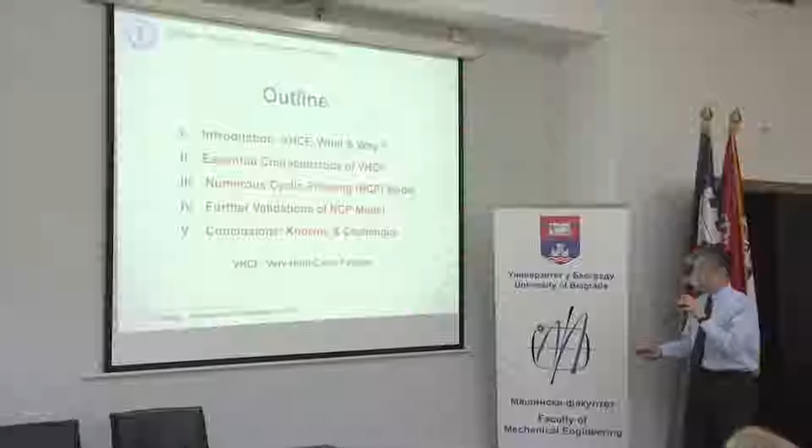Okay, this is the outline of my talk today. First, I have to give a brief introduction about Very High Cycle Fatigue. Perhaps some of you are familiar with this topic, and some are not, so I will give a brief introduction, then emphasize three aspects of Very High Cycle Fatigue. Finally, I give some conclusions, including knowns and challenges.

Okay, first I will say something about Very High Cycle Fatigue. Very simply, Very High Cycle Fatigue is fatigue failure beyond 10 to the 7 cycles of loading. Conventionally, fatigue limit is regarded as the fatigue stress or strength at loading cycles of 10 million.

This is an example showing this phenomenon: at 10 to the 7 cycles, this is conventional fatigue behavior, but after these points, beyond 10 to the 7 cycles of loading, fatigue failure may still happen. So we call this very high cycle fatigue—it's different from the conventional fatigue definition.

This is an example showing the major importance of very high cycle fatigue: fatigue crack initiation is almost always from the inside, from the interior of the material, the specimen. This example shows a cross-section of a specimen and the point of initiation, with an enlargement showing this type of morphology, and further enlargement showing the detailed feature of this initiation spot. I will go into detail about this phenomenon.

We always say very high cycle fatigue is a very important area to investigate, because many engineering structures require a large number of cycles of performance, often beyond 100 million cycles. Such a very high cycle is easy to reach—for example, if the frequency is 1 Hertz, just a little more than 3 years will reach 100 million cycles, and if the frequency is 10 Hertz, just 1 year will give more than 300 million cycles.

Here I will give you two very interesting, or very sad, examples. One happened about 4 months ago in the US: Southwest Airlines flight 1380. Perhaps most of us know this case—there was a Boeing airplane with damage to an engine blade made of titanium alloy, and the damage of the blade caused damage to the cowling, which hit a window. This accident killed a passenger—it was a lady.

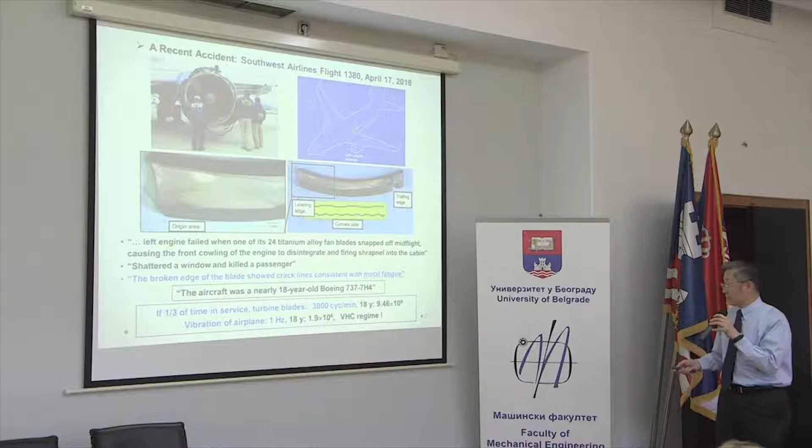Later examination showed a phenomenon of fatigue crack initiation and propagation, due to metal fatigue. What I'd like to emphasize is this airplane was already 18 years old, meaning it experienced more than 9 billion cycles of loading if we consider the rotation of the turbine. If we just consider the vibration of the airplane, it experienced about 200 million loading cycles. So it experienced a kind of very high cycle fatigue process. This is a very important point.

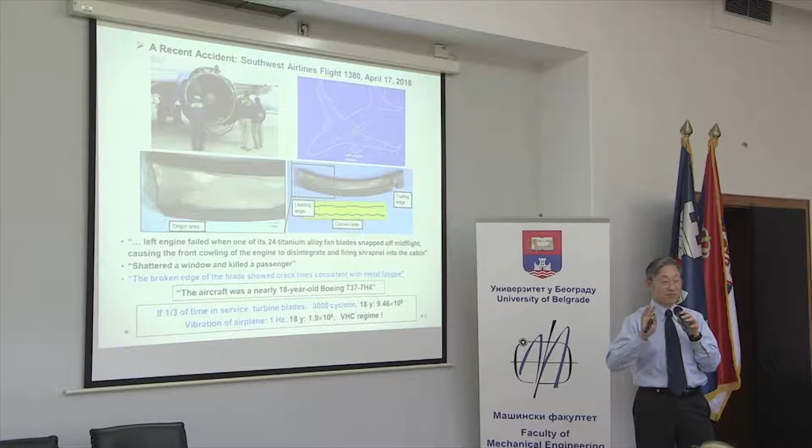So sometimes I say, for some new structures, new vehicles, they're very safe, no problem. But for some old ones, we should be very careful. I will say something in detail in my later slides.

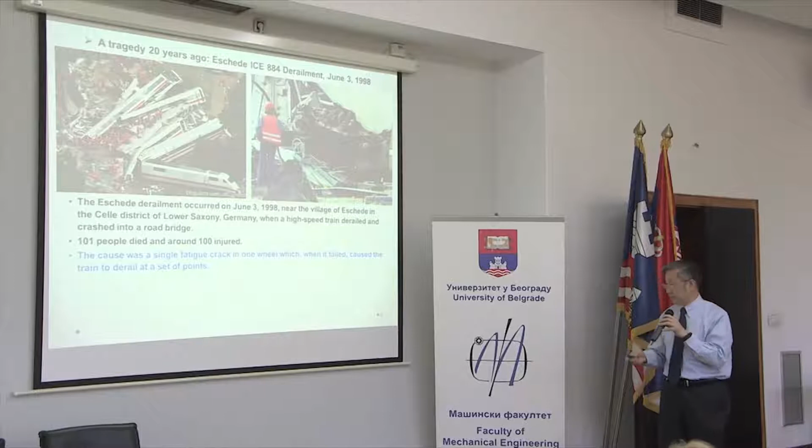Another case I think all of us know is the Eschede tragedy of the high-speed train. It happened about 20 years ago, and perhaps all of us know these noticed pictures, which I found from the internet. It's a very sad case that killed 101 people and injured another 100. What I'd like to emphasize is that this high-speed train had been in service for more than 7 years at the time of the tragedy, and it was a fracture of the wheel. It's a kind of wheel tyre fracture, and the final layer of the wheel fractured due to fatigue. It's a very sad story that caused a series of damage and this type of tragedy. This high-speed train had 7 years of service and experienced more than 1 billion cycles of loading.

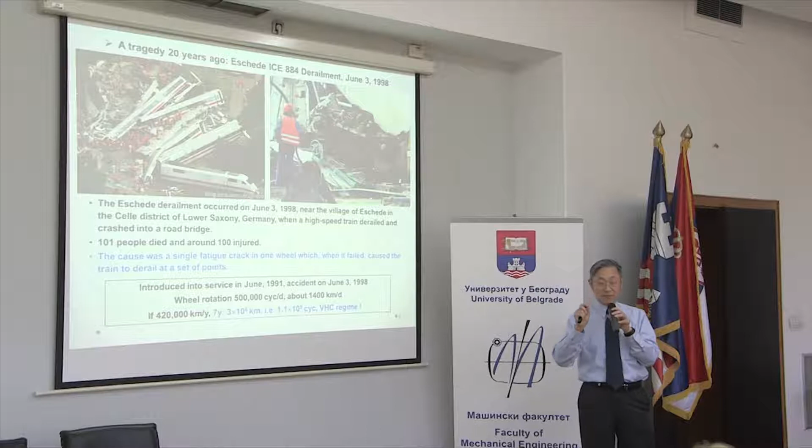Again, for the new ones, they are safe, but for some old ones, we should be very careful. Sometimes I discuss this concept at conferences, even in China. Now high-speed trains are quite popular and people are very happy because they are quite new. I say, perhaps after 10 years, we should be very careful, because perhaps some very, very tiny defects could develop. So we should have very strict regulations for this.

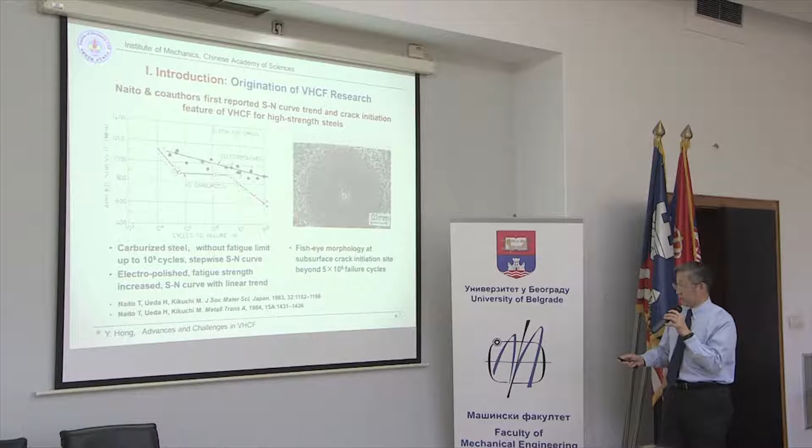Now I'd like to mention the origination of very high cycle fatigue research. Conventional fatigue is fatigue behavior less than 10 to the 7 cycles of loading, but very high cycle fatigue is beyond that. The origination of very high cycle fatigue research was about 35 years ago. This is an example for high-strength steels showing fatigue failure may happen after 10 to the 7 cycles of loading, with crack initiation from the interior of the specimen. Also for titanium alloy, I noticed this is almost the first paper on very high cycle fatigue, again beyond 10 to the 7 cycles.

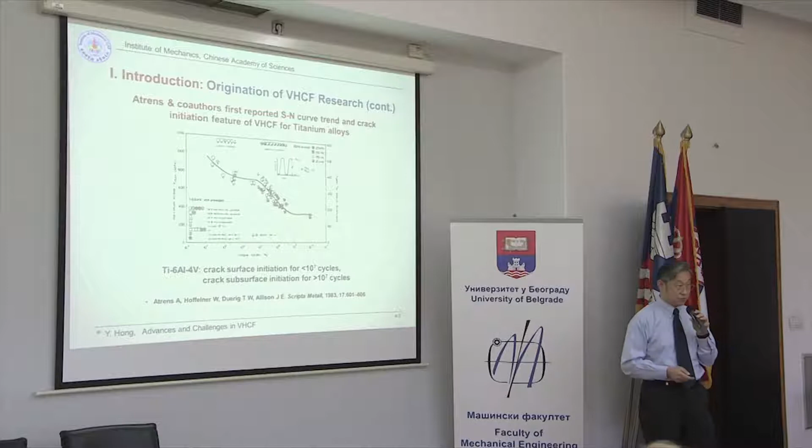The previous one for high-strength steels was done by Japanese researchers, and this one was by Swedish researchers. Of course, Professor Ritchie also did some very early work, I think in the late 80s or early 90s. There was a special issue of a fatigue journal, and Professor Ritchie was one of the authors of a paper in that special issue. As I mentioned before, in the early 80s Naito and his co-authors, and Atrens and his co-authors, first reported the phenomenon of very high cycle fatigue, but they just called it long-life fatigue. In '86, Stanzl and his co-authors called it very high cycle fatigue for the first time in a research paper. So the contributions by Japanese researchers, Swedish researchers, and also from Austria, form the basis of the origination of very high cycle fatigue research. These are almost the early days of research in this area.

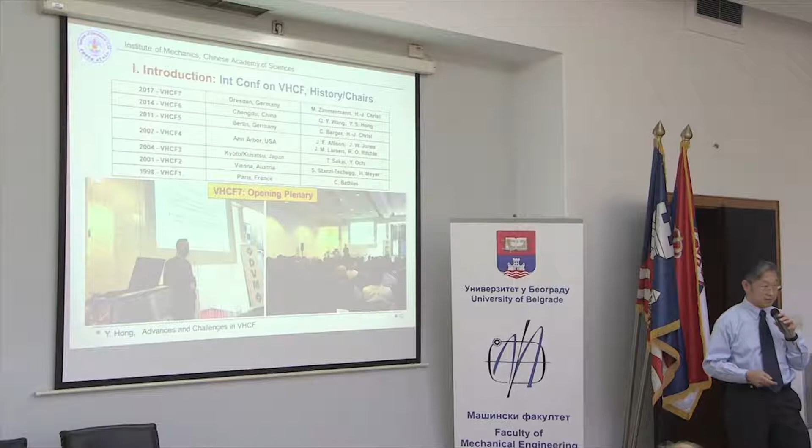This topic, this regime, has been quite noticed by the fatigue community. Since 1998, there has been an international conference on very high cycle fatigue, and then almost every 3 years there has been a conference, number 1 to number 7. The next one we'll have in 2 years in Japan. This is the one from last year in Dresden, Germany, where I was also invited to give a talk.

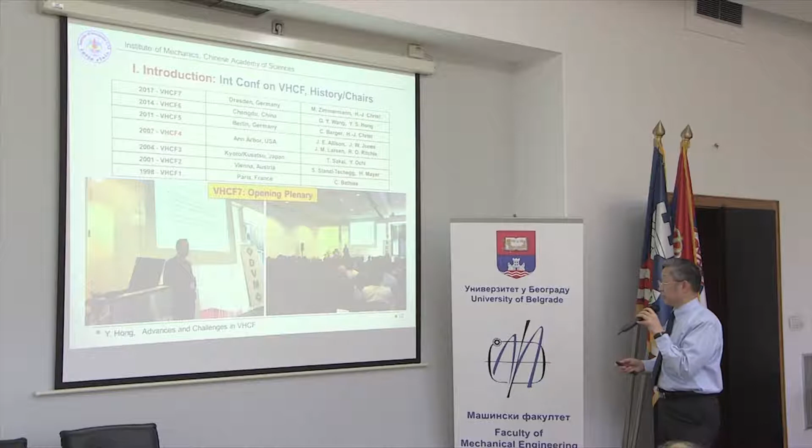I use this slide because I gave a talk some months ago in France at this International Congress on Fatigue. A professor from Germany—what's his name? He's a very famous professor who gave a contribution on the interaction between crack and dislocations. No, not Sosila... He's a guest editor of a special issue to commemorate Professor Bathias. Sorry to ask, but sometimes my heart has some problem, and I'll recover in a later class. Anyway, he raised a question that when someone talks about very high cycle fatigue, we should mention this series of international conferences, and later I noted the first one was organized by Professor Bathias from France.

Anyway, perhaps I used too much time for the introduction, so I will now emphasize 3 aspects of very high cycle fatigue.

So the first aspect is the essential characteristics of very high cycle fatigue, and in this part I emphasize three points. The first is internal crack initiation. Second is the SN curve style, and the third is the crack initiation life. These are the three points I would emphasize in this part.

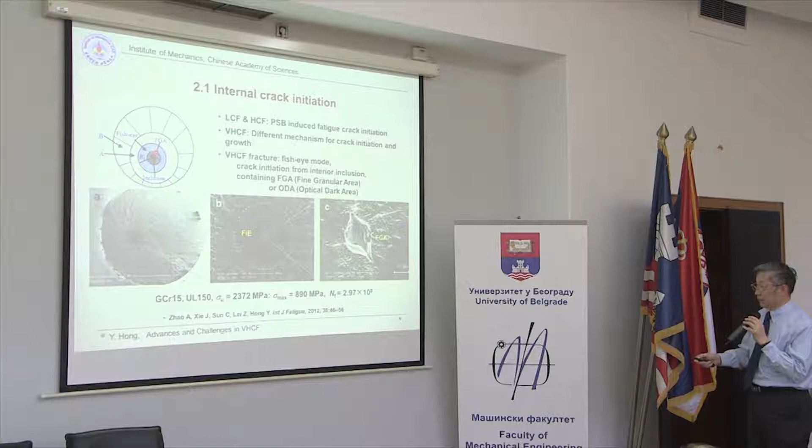This is an example of very high cycle fatigue. We may see the initiation spot, and there's a morphology called fisheye, and around the initiation spot there's a rough fracture surface called the fine granular area. This is the schematic showing this morphology: initiation spot, FGA fine granular area, fisheye, and then the crack growth region.

This is the case for very high cycle fatigue under a high stress field. This example shows the initiation spot, the FGA region, and fisheye. We may notice that this example is due to loading of rotating bending, so the initiation spot is somehow close to the specimen surface.

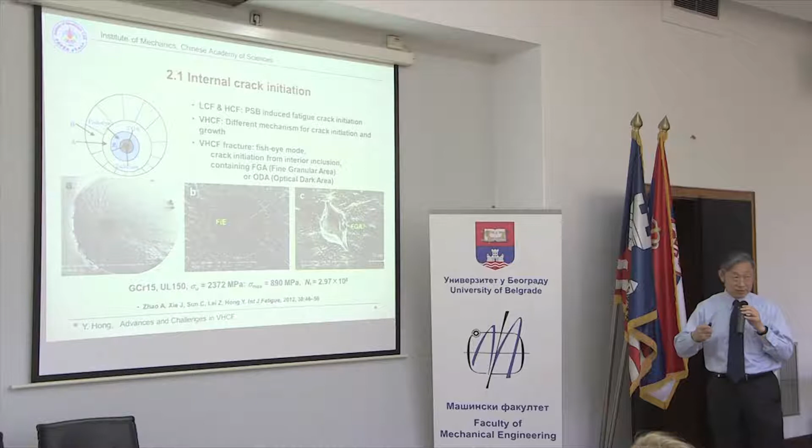The previous one is subject to axial loading, so the initiation location is somehow away from the surface. So it's different. One of the reasons is due to the different styles or modes of loading.

We measure the size of this FGA, fine granular area, and find the size is between 40 and 100 microns - a very small size. I measured this; this is the initiation area.

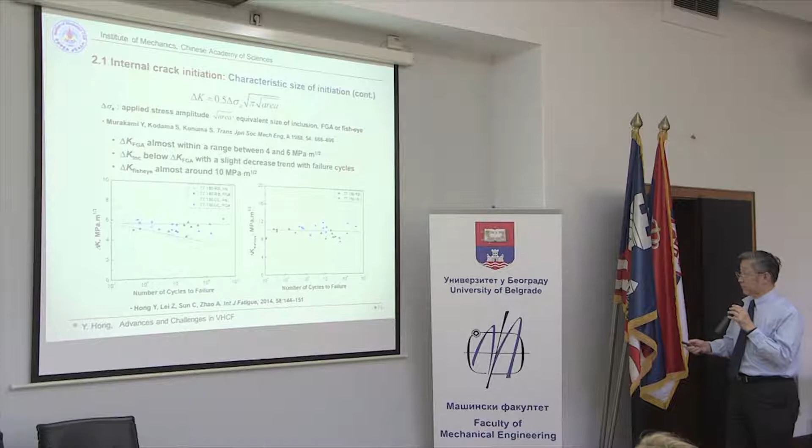We also have more data to show this, and we use the parameter delta K, the stress intensity factor range, to characterize this small area. The data show delta K FGA is between 4 and 6 megapascal root meter. We collected a large number of data from the literature to show the size of FGA as a function of maximum stress, and we see that most data fall within the lower bound of 4 megapascal root meter and the upper bound of 6 megapascal root meter.

So we find this value of delta K for the initiation region is very stable across different loading examples, different loading cases, and different sizes of the initiation region. No matter how these factors change, the delta K value is very stable.

So it's very interesting. We conclude that the size of FGA is an intrinsic characteristic region, or intrinsic characteristic size, for interior crack initiation. This is our consideration as we try to propose this concept for very high cycle fatigue behavior.

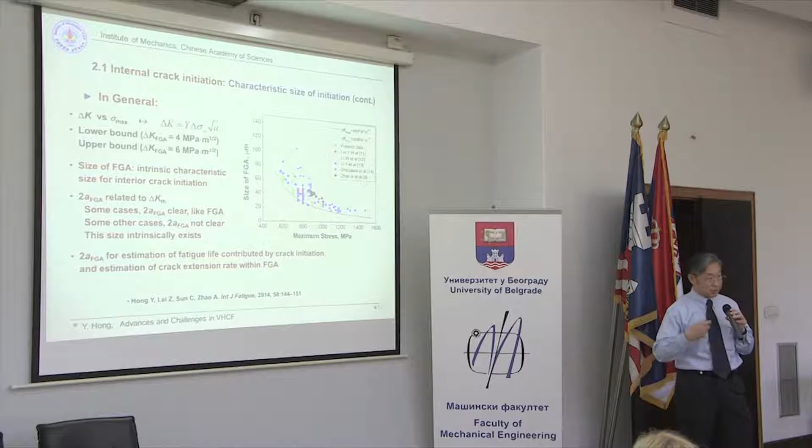The previous examples are cases of high strength steel. Here are examples for titanium alloys.

You may also see the initiation region with fisheye, and the initiation area shows a kind of rough area. But the difference is that for titanium alloys, the initiation size is due to the coalescence of cleavage facets, always from the alpha phase of the titanium alloy. This is the schematic for the coalescence of facets, the rough area, then fisheye, crack steady growth or stable growth, and finally failure.

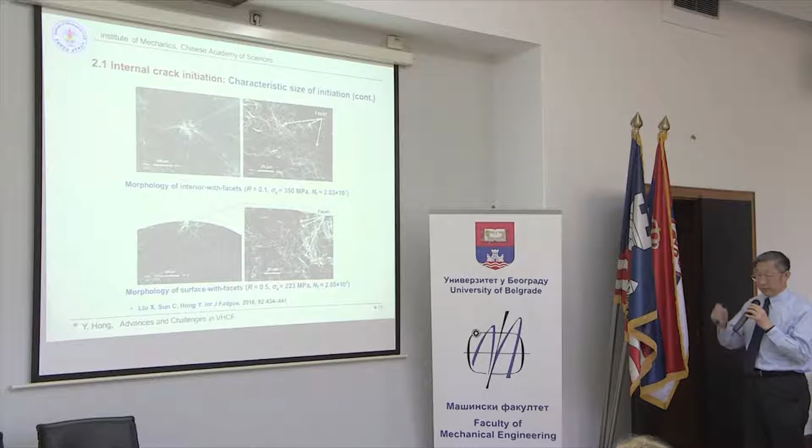For titanium alloys, we also measured the size of the FGA region, and it's between about 120 and 390 microns - still within a certain range. The value of delta K is between 6 and about 8.7 megapascal root meter, which is similar to the case of high strength steel. It's quite stable, so this phenomenon is not just for high strength steel, it's also for titanium alloy.

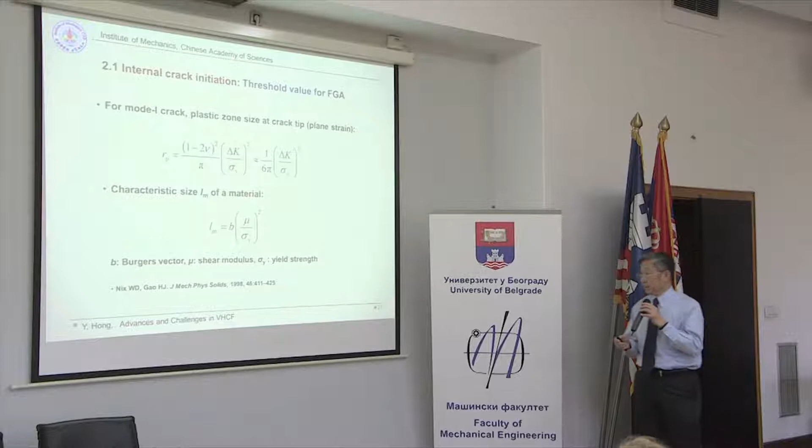So we try to estimate the threshold value, to find how we can calculate the value of delta K for this crack initiation region. We use these expressions: the first is the plastic zone size at the crack tip, and the other is the size of the characteristic microstructure of the material. The important point is that we assume when the plastic zone size at the crack tip equals the characteristic size of the material, the development of this initiation region will be completed.

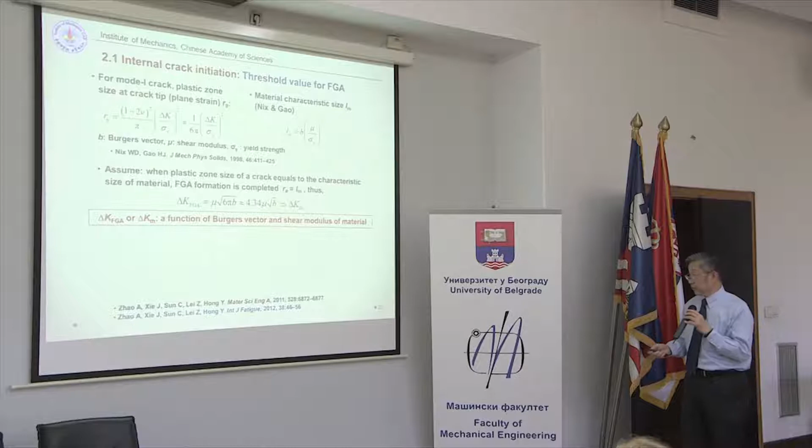Of course, you may argue this type of assumption, but we made it, and we are able to get this expression showing that the value of delta K FGA is just a function of the shear modulus and Burgers vector of the material.

So it's very simple and clear, telling us what is connected with this important variable in relation to, or responsible for, crack initiation. We get results for steels, for titanium alloys, and for aluminum alloys. Such values are in good agreement with experiments.

So this is the first characteristic I would like to mention for Very High Cycle fatigue. And the second aspect is about the SN curve, the stress and failure cycles of fatigue.

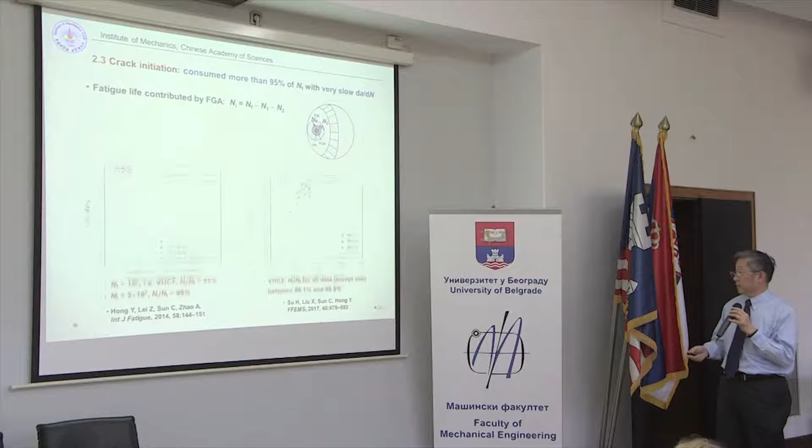Based on these considerations, we can obtain these results for high-strength steel and also titanium alloy. The important thing is that for Very High Cycle Fatigue, the initiation life is so large that it takes more than 95% of the total fatigue life for high-strength steels and also for titanium alloys.

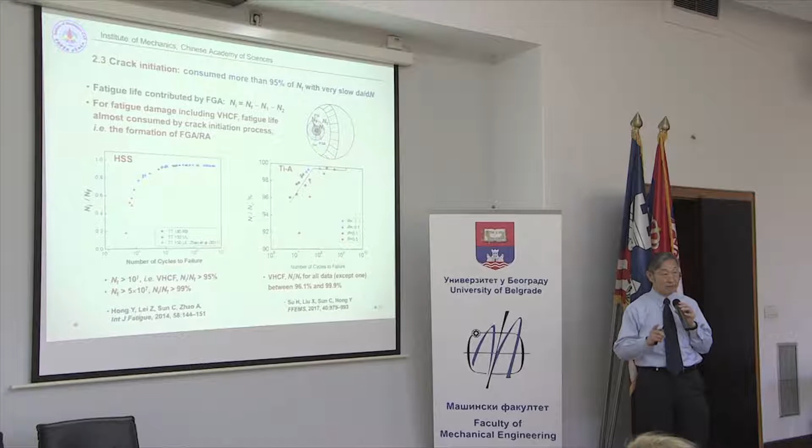So I just reiterate, for fatigue damage including Very High Cycle Fatigue, the majority of the fatigue life is consumed by the initiation phase, the initiation process. It's a very, very important phenomenon for Very High Cycle Fatigue, so it's quite dangerous for engineering structures.

If we know the life consumed by initiation, and also know the size of this initiation area, we can get an average crack growth rate or crack extension rate. It's simple, and this is an example for high-strength steel and titanium alloy.

We notice that the rate is so slow for high-strength steels, 10 to the minus 12 and 10 to the minus 13 per cycle, and for titanium alloys, very, very slow as well.

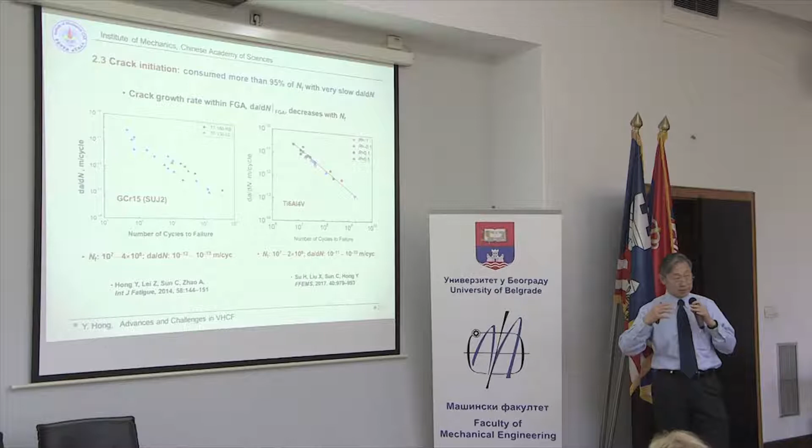So this phenomenon and data are connected with the previous one - the fatigue life, where initiation consumed, almost takes a dominant part of the fatigue life.

The previous ones were obtained by estimation, and recently we tried to perform direct measurements of crack initiation due to Very High Cycle Fatigue. This is an example showing - we used a kind of two-step loading or variable loading, and one of my students was lucky to catch this phenomenon, growth traces, very, very small.

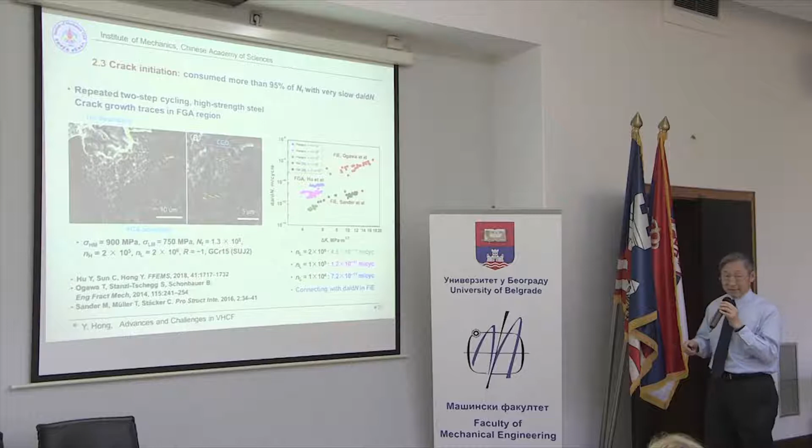The size is very small, and the results show it's between 10 to the minus 11 and 10 to the minus 13 per cycle. We are also happy to put the data there and see that our measurements connect with the crack growth data after initiation - meaning our measurement for crack initiation can match with the data in the literature measured after crack initiation.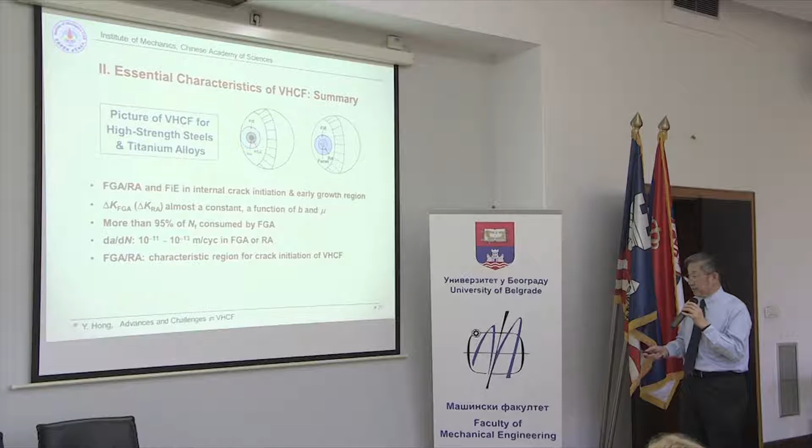A very important point is we emphasize, or we propose, that the size of FGA - this region of crack initiation - is a characteristic region for crack initiation in Very High Cycle Fatigue.

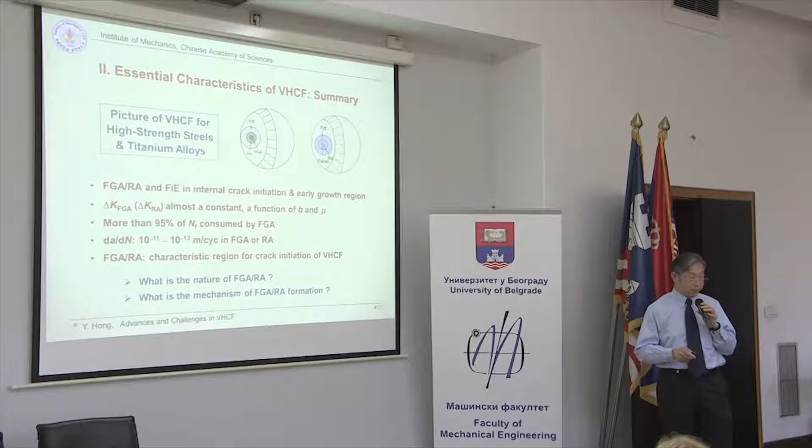At this point, we may come up with two questions. First, what is the nature of this initiation region? The second one is, what is the formation mechanism of this initiation region?

So, what time is it? You can take as much time as you want. But I have shared with you the first aspect of what I'd like to emphasize, which is the major one.

The third part, which is the second aspect I'd like to emphasize, is the model to explain this phenomenon. In the beginning, I mentioned some previous models available in the literature. The first one considered that this type of crack initiation is due to the existence of hydrogen.

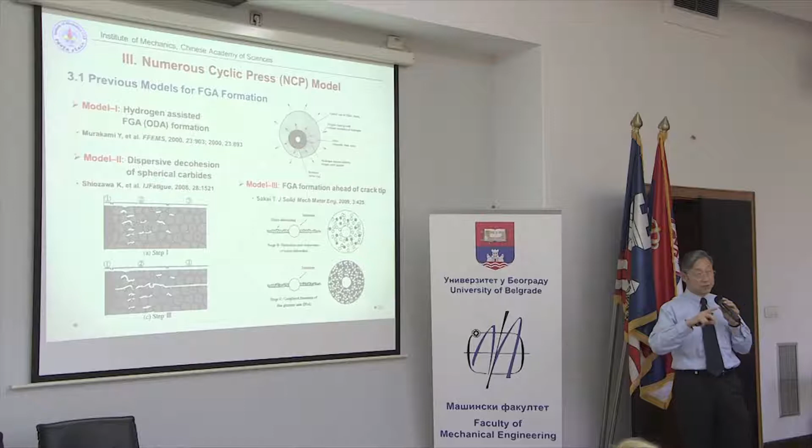Briefly mentioned is due to hydrogen. And the second one is due to the decohesion of carbide and matrix, which can induce this type of rough surface of carbonization. And the third one is due to plastic deformation and cracking, causing microstructure refinement and then causing the rough surface of carbonization. And we have others.

I just would like to mention that for such previous models, they all emphasize this type of crack initiation morphology was formed before crack initiation, I emphasize before. So this is their key point, their key concept.

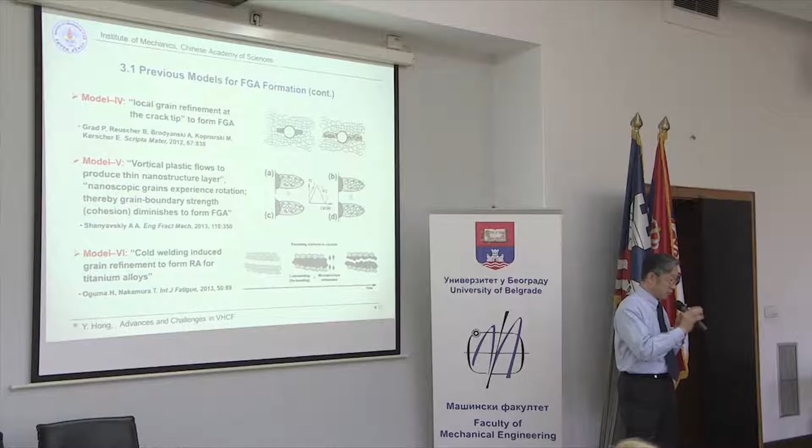But such models have limitations. They could not explain different experimental observations, like different materials, different stress ratios, different failure cycles. So we consider it necessary to propose some new models, new mechanisms, to explain this type of phenomenon, this type of propagation.

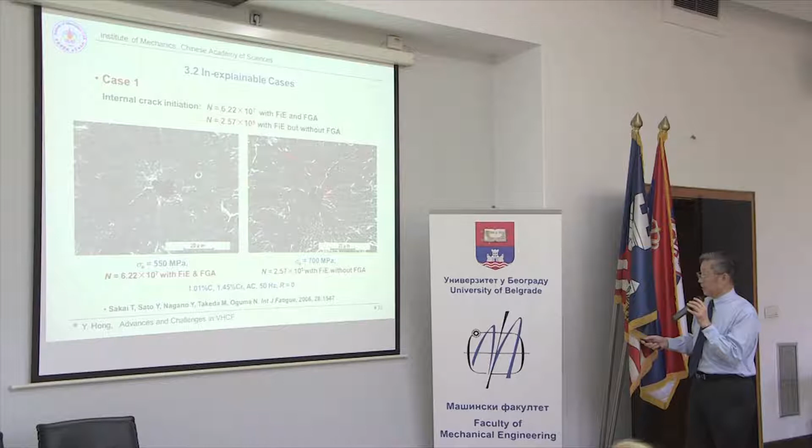At this stage, I emphasize some very interesting examples. This one shows that for the failure cycles at 60 million cycles, within the very high cycle regime, there is an initiation region with FGA morphology. But for the case of 10 to the 5 cycles alone, it's also internal crack initiation, but without rough morphology at the initiation area.

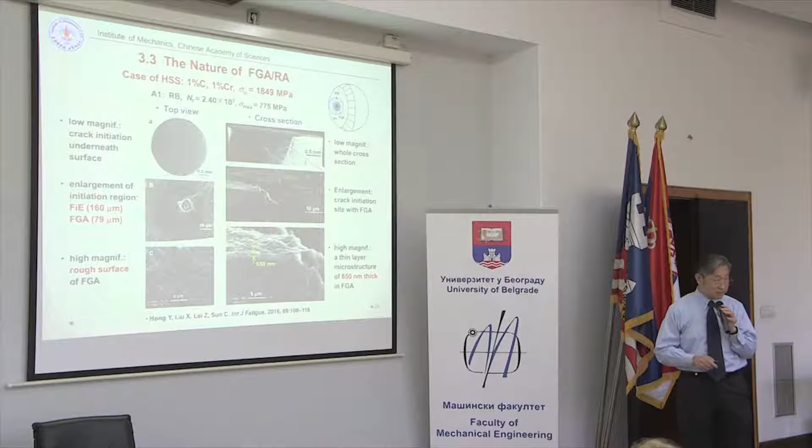So at this step, we would like to identify what is the nature of this initiation region. For the case of high-strength steel, we select an example to observe the fracture surface on top, and we see again the fish eye and FGA and initiation spot from an inclusion, and the FGA is a rough surface, and this cross-section morphology. It's interesting that the layer of this rough surface is about 650 nanometers, but this is just a kind of rough observation.

In detail, we cut a TEM sample layer using focused ion beam, and the TEM image shows underneath this initiation surface - here it is a coating to protect the surface - and it's a layer of refined microstructure. The diffraction shows a kind of continuous pattern within the diffraction area of 200 nanometers. There are several grains inside, meaning the microstructure was very much refined. But away from this surface is an isolated diffraction spot, meaning just one grain, or coarse grain.

So we find the microstructure there has nano-sized grains. Further measurement shows the average size of the grains underneath the fracture surface is about 50 nanometers.

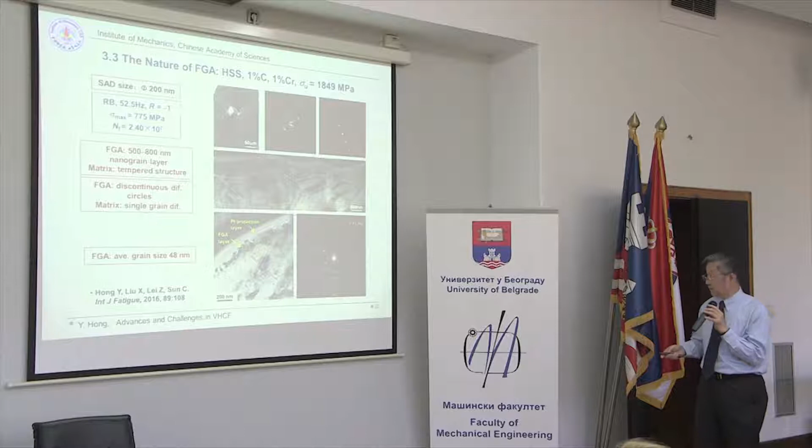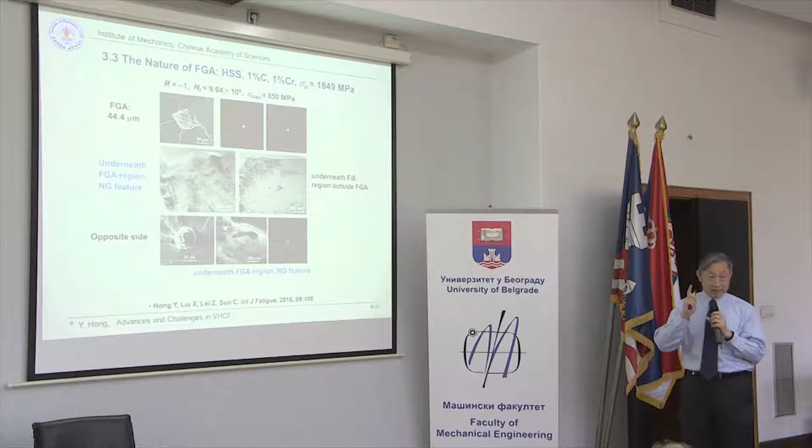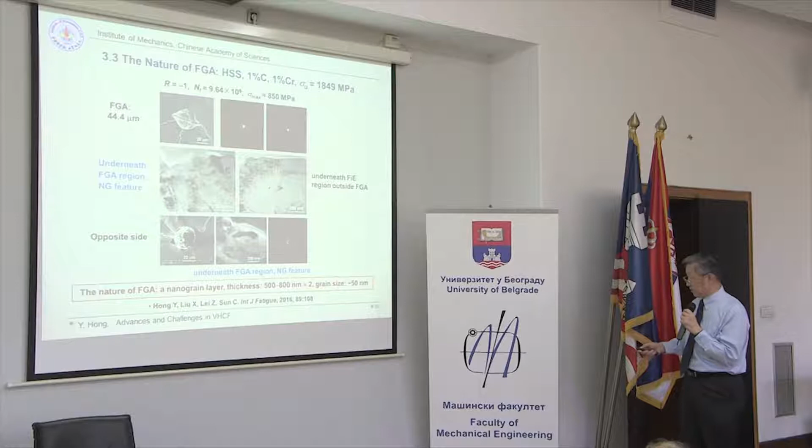We cut the film sample, or TEM sample, at the same location, between the boundary of the crack initiation region and the fish-eye region. It's not very clear, but we can see a continuous diffraction at the initiation region for both surfaces. But away from the initiation region, or just beyond this region, is a single grain diffraction. So we say the nature of FGA in this initiation region is a nanograin layer. The thickness for the high stress layer is several hundred nanometers on both surfaces, and the average size is about 50 nanometers.

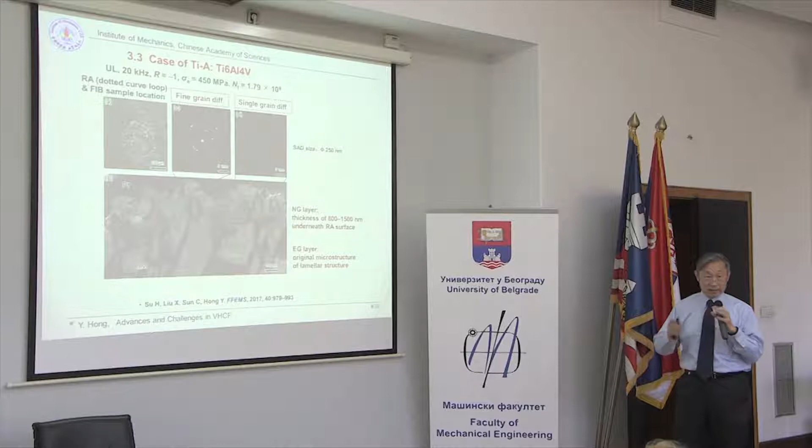This is also an example of titanium alloy, but with a different type of microstructure - it's a kind of lamellar structure, and the other one is equiaxial grains - and all of them show almost the same phenomenon of a nanograin layer underneath the fracture surface, while away from the fracture surface is an isolated diffraction. The thickness is 600 and 1500 nanometers. So we say for titanium alloys, there's also a kind of nanograin layer underneath the fracture initiation region, and we measure the average grain size at this region to be about 100 nanometers.

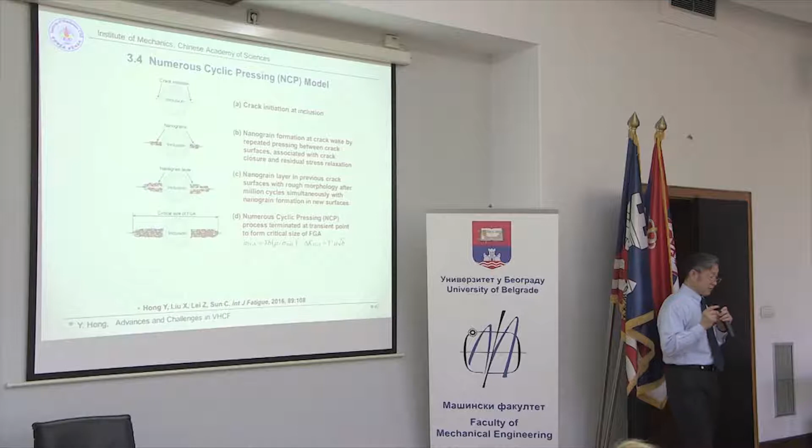So based on such observations of the crack initiation region, we propose a model of numerous cyclic pressing, meaning that the crack will initiate, for the case of high-strength steel, from the inclusion, or we may say from the interface between the inclusion and the matrix. After that, the crack surfaces can contact each other due to crack closure and also the relaxation of residual stress. This process may repeat again and again due to a large number of cycles.

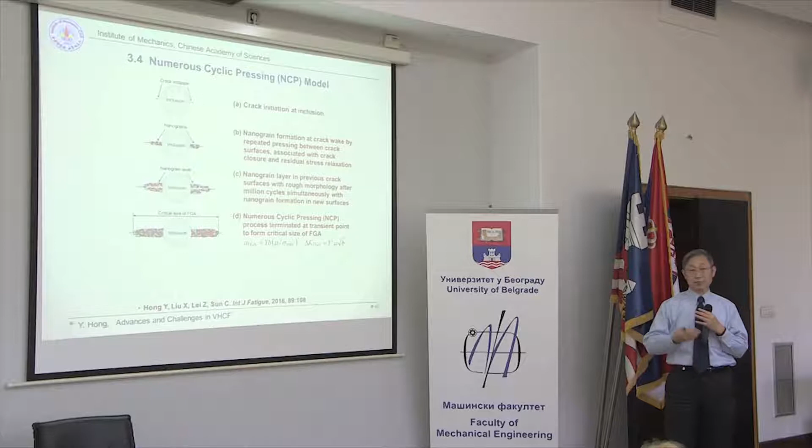And this process is possibly to produce refined microstructure. This is our basic consideration, or the main concept of our model.

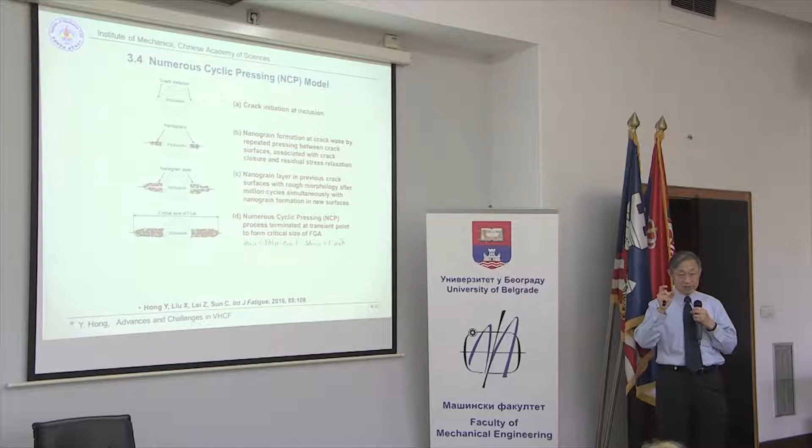Briefly speaking, our model emphasizes that this type of initiation characteristic region is formed after the crack initiation. Previous models said it was formed before. Our model says it's after the crack initiation, due to the phenomenon or mechanism of crack closure and residual stress relaxation.

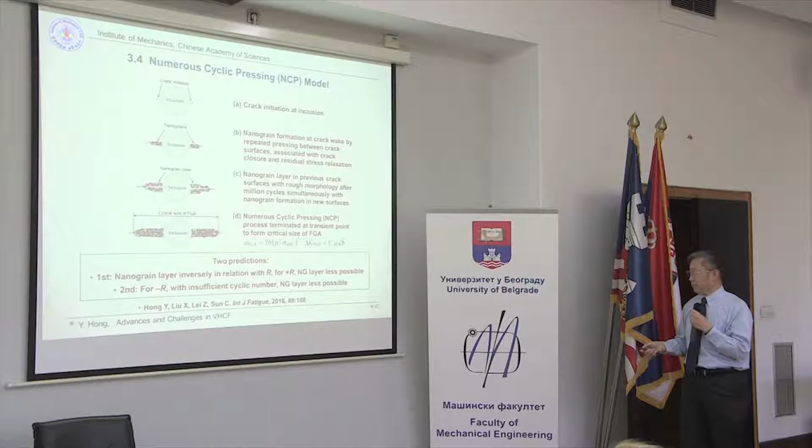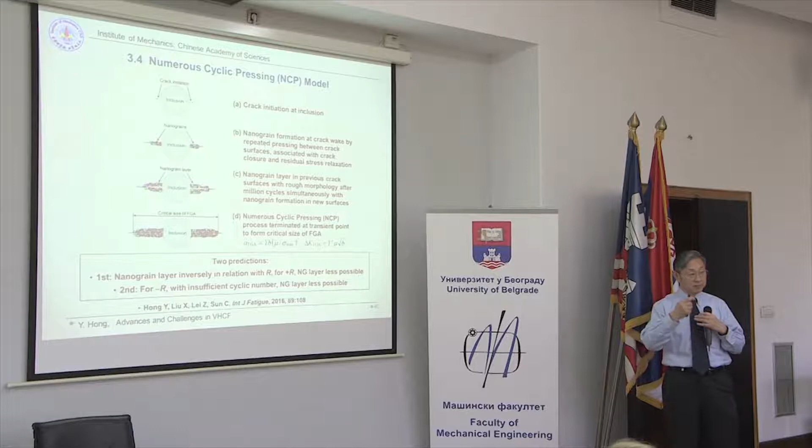And then we may have two predictions based on this model. The first is that for positive stress ratios, this type of nanograin layer could be less possible. The second is that even for negative stress ratio, if the loading cycle is insufficient, this type of morphology will be less possible, because this feature is related to the contact of crack surfaces.

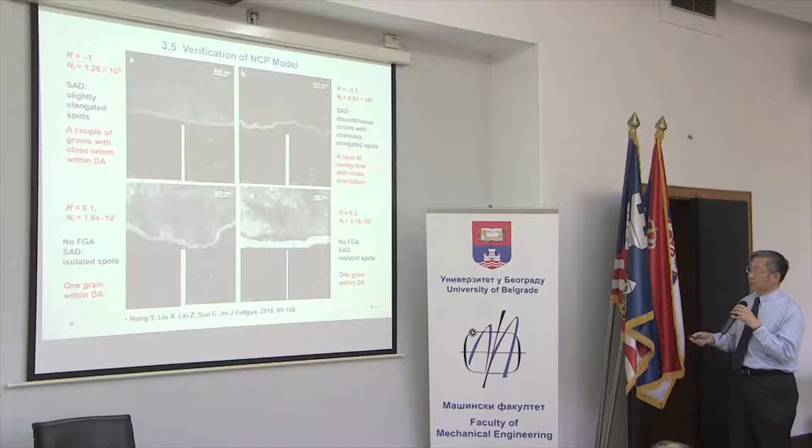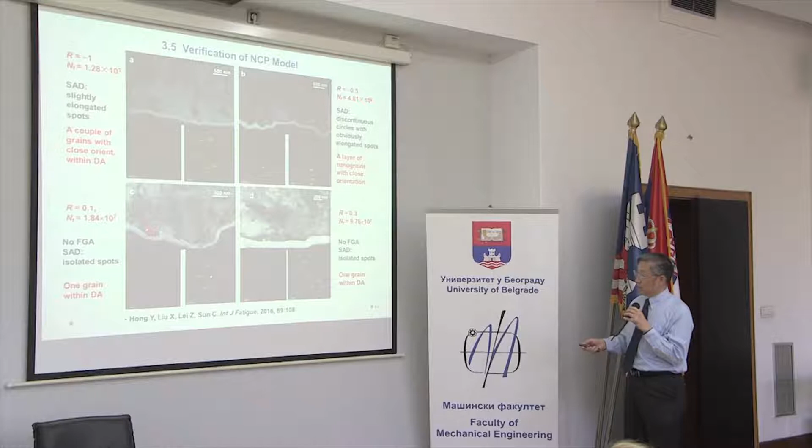For this one and this one, there are 0.1 and 0.3 stress ratios. The diffraction underneath the fracture surface shows all isolated spots, meaning no evidence of microstructure refinement. So this is the verification of the first prediction, and this is the verification of the second prediction.

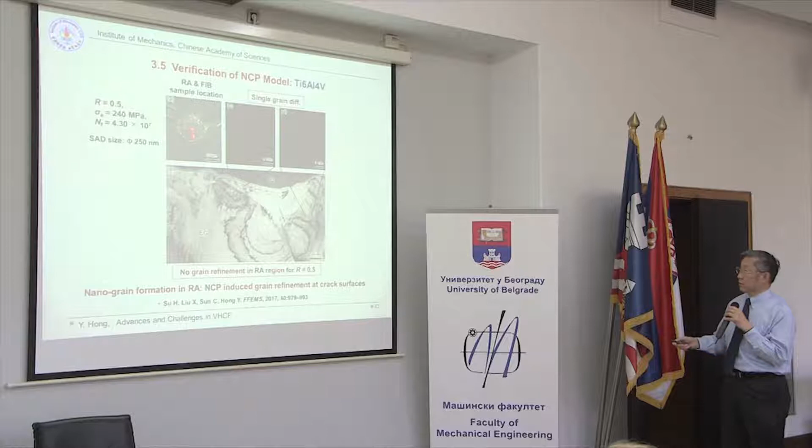That's all. Okay, for titanium alloy, we also performed observation tests with 0.5 stress ratio, and we observed the fracture initiation region. We may see a very nice microstructure just underneath the fracture surface without microstructure refinement, and the diffraction pattern shows isolated spots, coarse grains. This is also a verification of the first prediction.

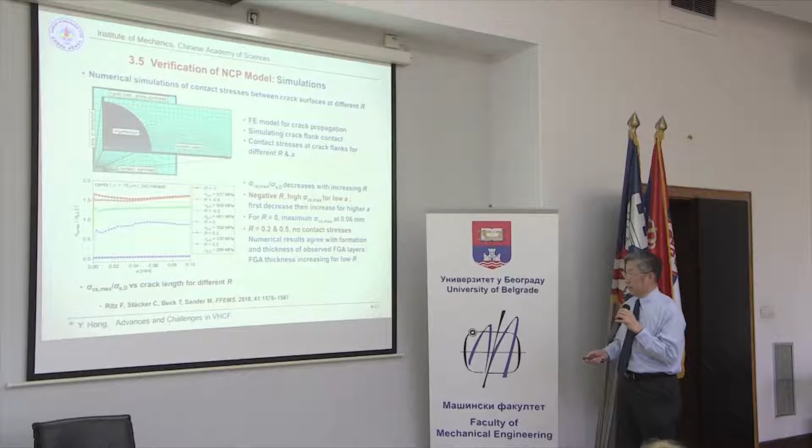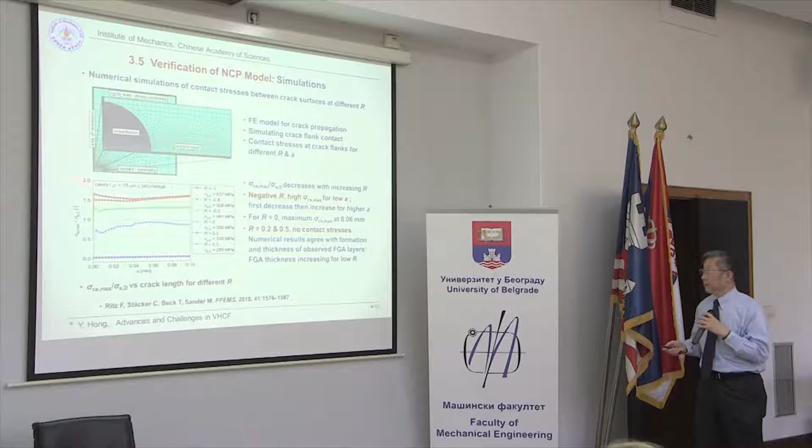This is a simulation result given by two German research groups, one Professor Beck, the other Professor Sander. Their simulation result shows that for different stress ratios, positive ones like 0.5 have no contacting stress at the surfaces. For negative stress ratios like -1 and -0.8, they have quite a large value of contacting stress. So this also supports this type of process, the contacting between crack surfaces after crack initiation.

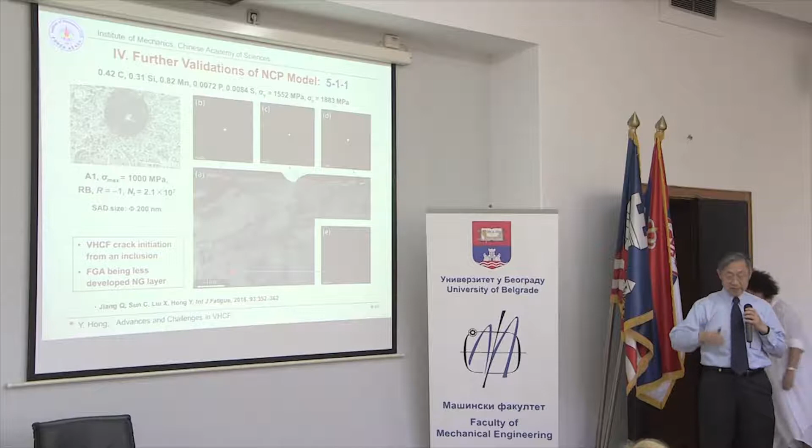Okay, I have shown you some phenomena and also our model. Now I would like to share with you some of our new results.

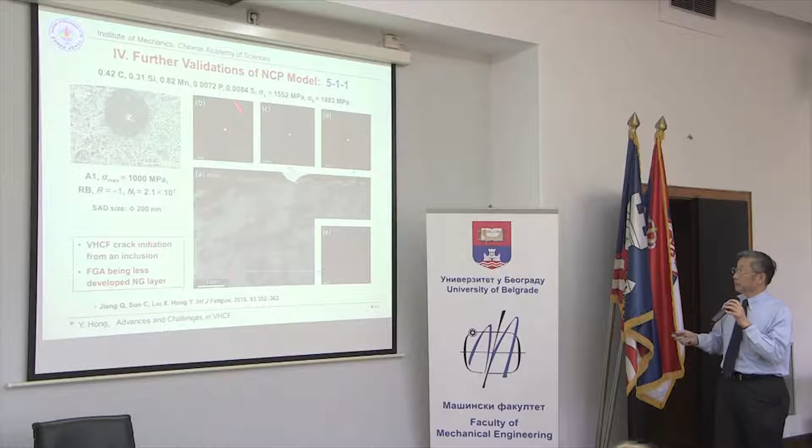This is the first group, and the material is a kind of structural steel, very similar to that used in high-strength axles. This is a fatigue failure just a little bit higher than 10 to the 7 cycles of loading, and the diffraction underneath the surface is a little bit discontinuous. But for the case of 10 to the 8 cycles, with much more loading cycles or fatigue life...

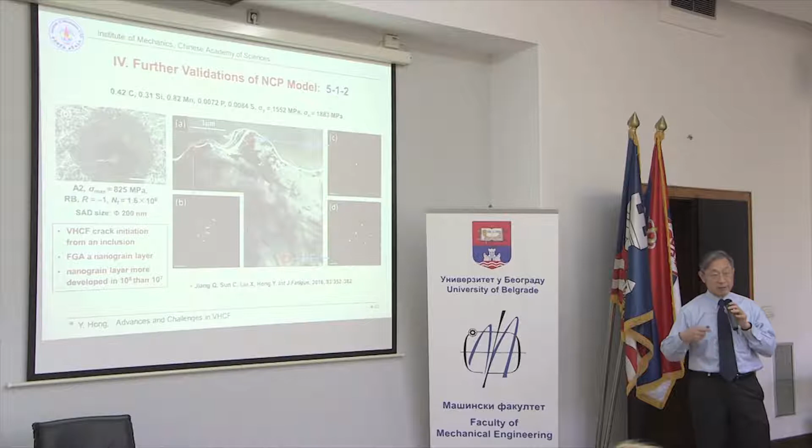The microstructure refinement is somehow much more evident than the previous one. So we said that crack initiation is from inclusion, and the FGA is a nanograin layer, and this nanograin layer is more developed in 10 to the 8 cycles rather than 10 to the 7 cycles alone.

Also, we observe that crack initiation, or internal crack initiation, may also form at grain boundaries. But for this type of process, the morphology underneath the fracture surface is not very clear evidence of grain refinement. We still have some questions about it. We also have some explanations, but we still need further investigation for this phenomenon.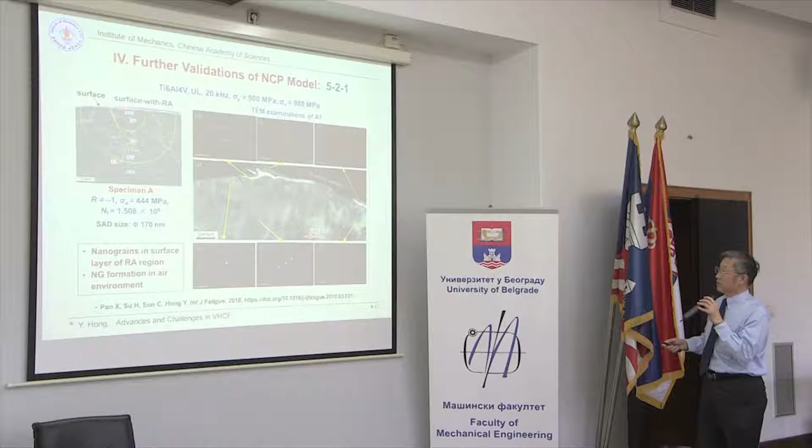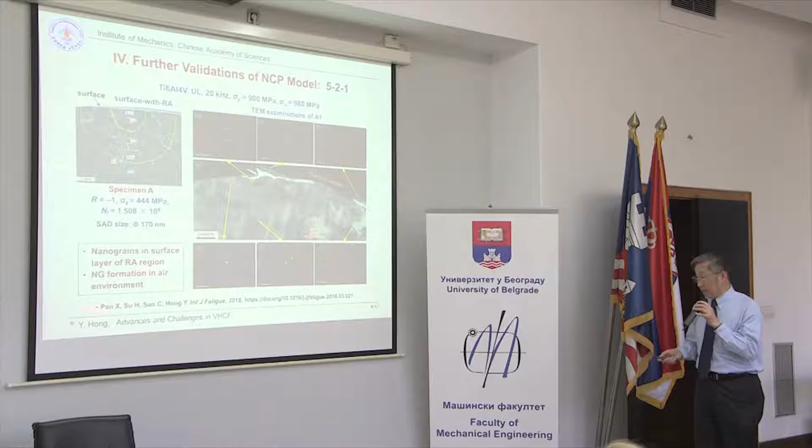This second set of new results is from titanium alloy. This is an example with crack initiation at the surface with rough area, meaning the crack initiation spot is just underneath the specimen surface. We cut 3 TEM samples, and this is the first one, A1, showing microstructure refinement underneath the fracture surface. This is also evidence to tell us this type of microstructure refinement process can be formed under air environment, not just inside a vacuum environment.

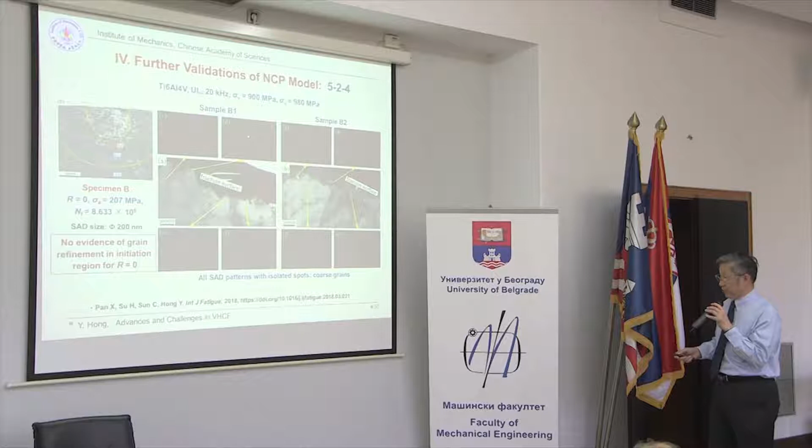Some results say this type of phenomenon can only be found in vacuum environment, but this is what we obtained recently. For A2 and A3 specimens, we may also observe microstructural refinement underneath the fracture surface layer. And also for positive, this is the 0 stress ratio, and especially for 0.1 stress ratio, there is no evidence of microstructural refinement for titanium alloys.

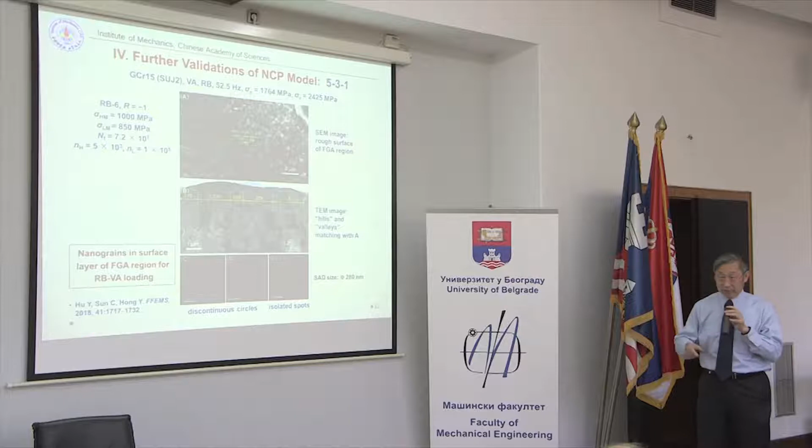The third set of example is again a high strength steel, but this time the experiment is used for crack growth rate during initiation, due to two-step loading or variable loading. Even for this type of loading, we observe the grain refinement underneath the fracture surface. So it's also the same.

I think that is okay. Now I will conclude my talk.

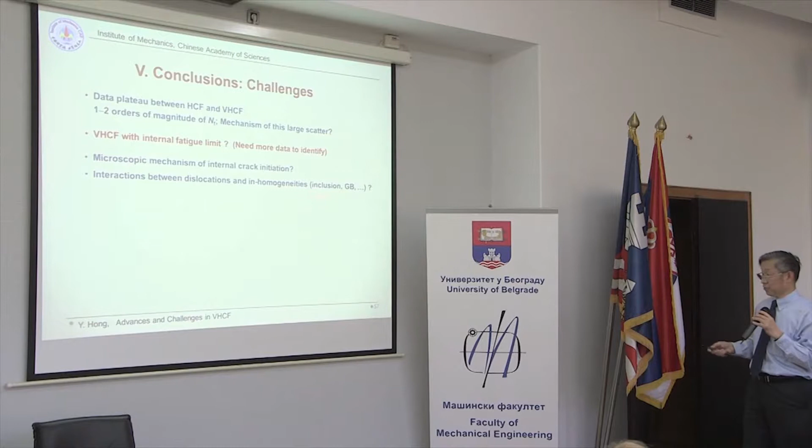The third and fourth points: what is the microscopic mechanism of internal crack initiation, and how about the interactions between dislocations and inhomogeneities, like inclusions and grain boundaries? And also, what's the reason for termination of the initiation characteristic region?

Also, what is the environment for this initiation region formation? We need more data to identify these points, and we should do some extra experiments to reveal the stress field surrounding the crack origin, and also the effect of crack closure and residual stress on initiation.

And finally, we should address the process and mechanism of crack growth. The initiation is at a very slow rate. So this is what I like to mention, but we don't know - we just know little about such questions. It's a new regime that requires more investigation.

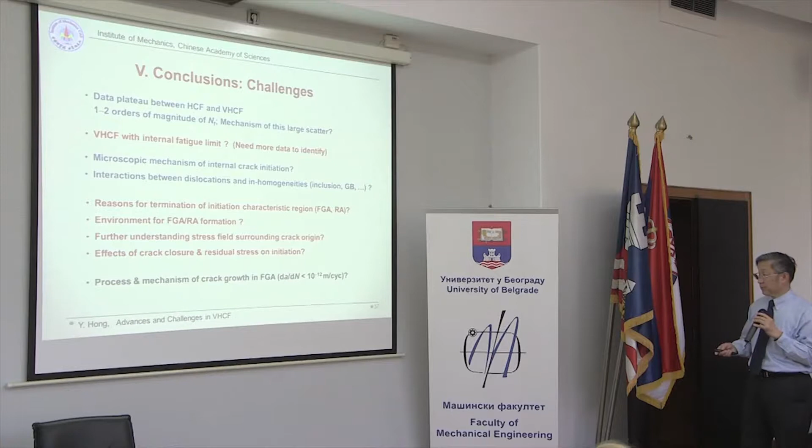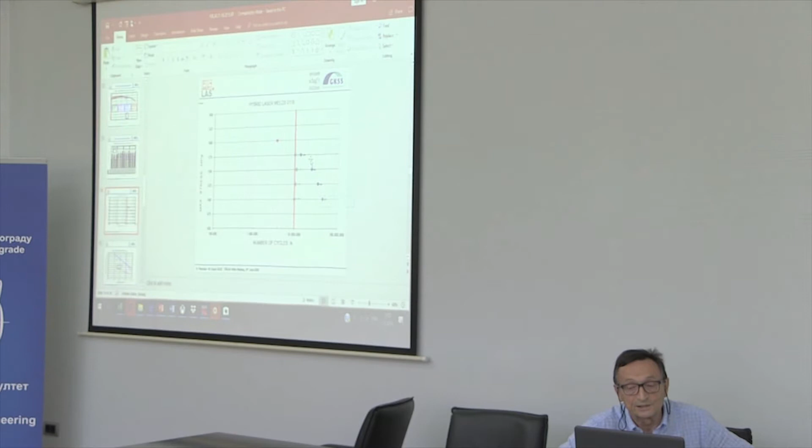Just adding one specimen, different stresses. Can you make it a large screen?

Full screen please. Perhaps Professor, remember someone asked about coaxing. This is the phenomenon of coaxing, C-O-A-X-I-N-G. Someone from Japan asked about this. At that time I understood what coaxing is, and it's sometimes used to get the material reinforced or kind of pre-treated, something like that. I think this type of phenomenon is related to the material property.

Sometimes I should ask, what is the tensile strength and yield strength of this material? We should know this. No one has ever really explained coaxing properly, but it seems to me it's associated with local stresses. You cycle at low stress, and for some kind of low stress, they may cause cyclic hardening, or the other possibility is cyclic softening. Who knows which way, but you're building in residual stresses.

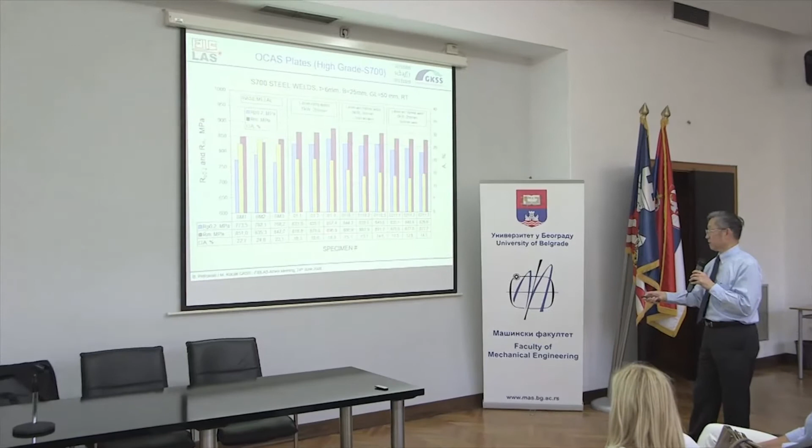Here are the base metal and different kinds of welding procedures. Base metal, three specimens, then laser-only weld. This is tensile strength, right? Ultimate tensile strength, 850. So your loading rate is evidently lower than this value.

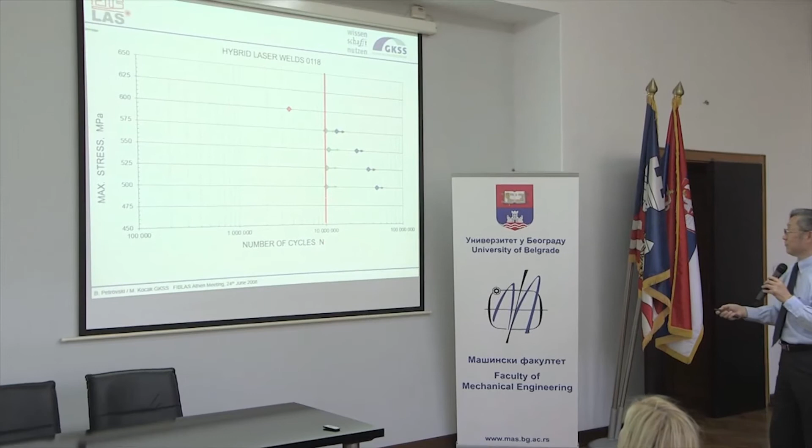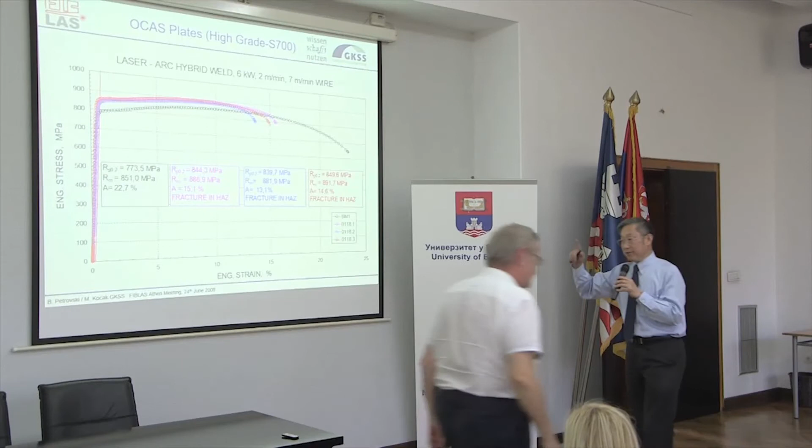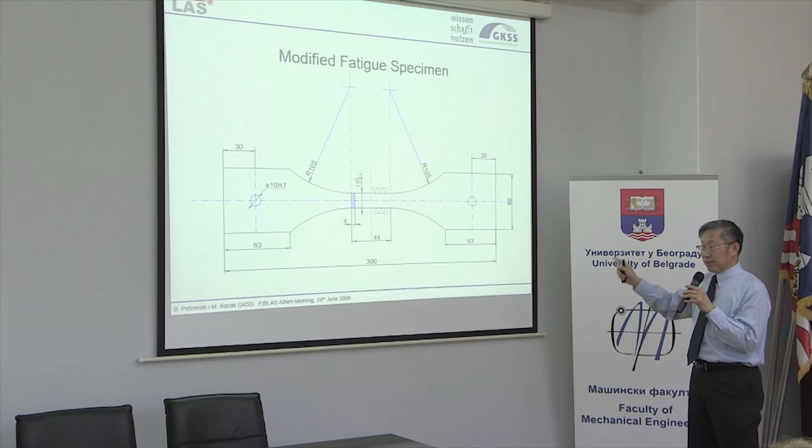In my opinion, for such a case, there should be no evidence of plastic deformation. As I know, some investigations or experiments use this type of specimen again if it doesn't fail, and they just take this case as a new specimen. They assume there was no damage even beyond or after 10 to the 7 cycles of growth.

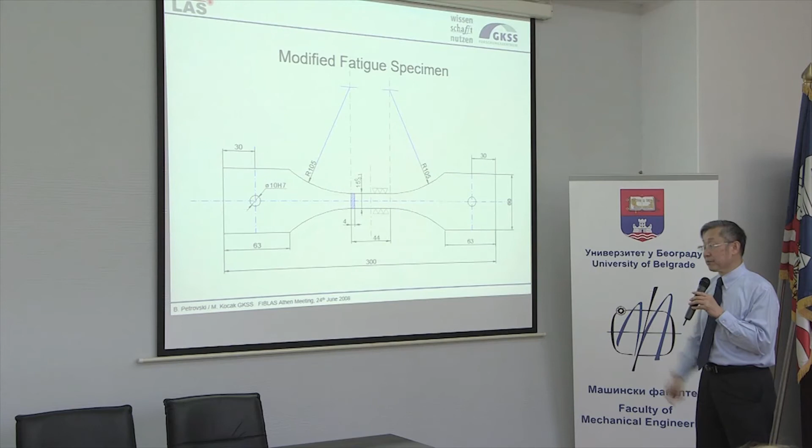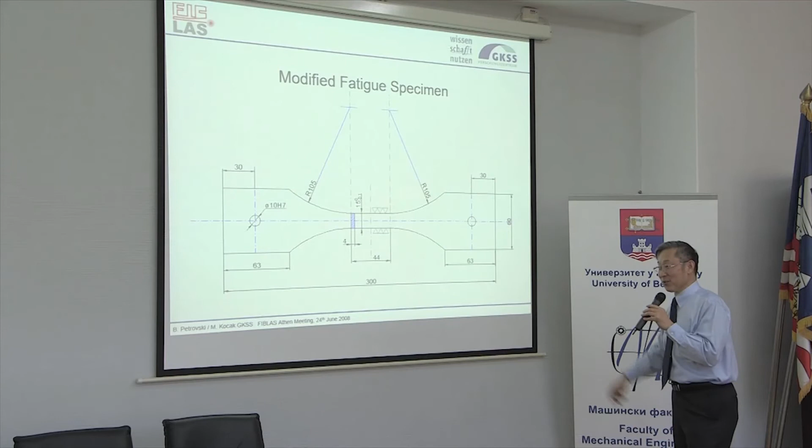And what's your specific question? Can you use it again? Is it a stupid idea or is it okay to present such a case? I think it's clever, because you can save your resources. What I said is, for such a case, it seems there's no evidence of plastic deformation.

But it may be different for different types of materials causing this. Anyway, it'll obviously be somewhat different, but the primary effect has to be local. Back stresses will move dislocations in one direction - it's not difficult, they'll come back again. Motion effects, all these things would play into that. The thing that's of concern though, some people measure the fatigue limit that way by stepping up, which automatically raises the fatigue limit. It's somehow close to the true stress value, but it's never really been satisfactorily explained - no one's really looked at it before. It's called step loading or something like that.